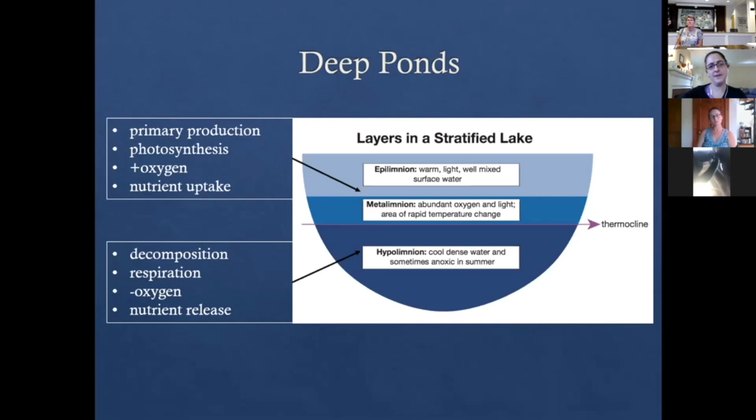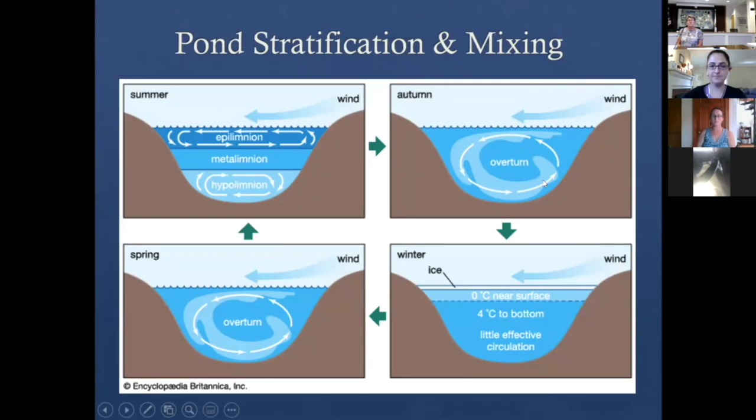So looking at Schoolhouse Minister Pond, as Jane mentioned, there's been a lot of effort going into studying this, and a lot of this has come from volunteers helping to do monitoring both in coastal waters and also in the ponds, particularly in the past. So in 2008, there was a study by SMAST. This is a school out of the University of Massachusetts.

And they looked at 10 ponds that had been studied in Eastham, with data collected from 2001 to 2006. This was part of the Barnstable County PALS, or Pond and Lake Stewardship program. Some of you may be able to give a wave. I'm sure some of you may have been involved in collecting that data.

So that measured everything from temperature, DO or dissolved oxygen, water clarity with Secchi depths and discs, alkalinity, chlorophyll A, which is really a measure of algae, and also nutrients like nitrogen and phosphorus, and then pH.

One thing, again, that's just important to note for ponds. Ponds typically, in the freshwater sense, are phosphorus limited. So when you have too much phosphorus, that's when you tend to have problems with too much plant and algae growth. Nitrogen, however, is also important to look at in freshwater ponds, because when you have too much phosphorus and too much nitrogen, the nitrogen kind of facilitates that extra growth that phosphorus allows for the plants and algae.

More recently, as Jean mentioned, Solitude Lake Management was hired to do assessment of the pond's conditions since 2009, and they've been monitoring both vegetation and water quality. So this is the most word-dense slide we've got, but here's kind of a combination of some of those results from all of those studies.

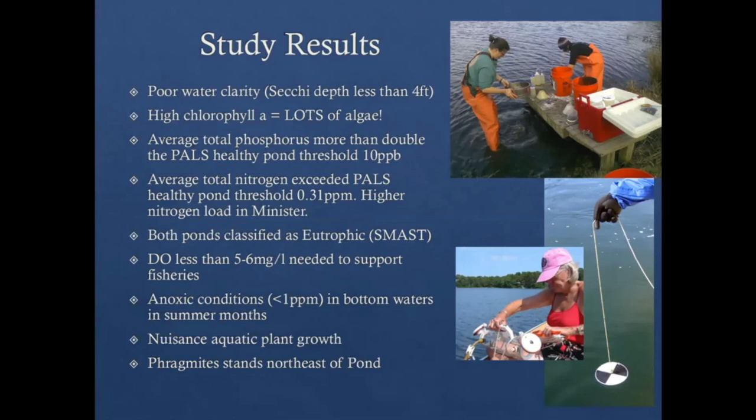And looking at the nutrients, again, total phosphorus and total nitrogen both exceeded what was set out as the healthy pond threshold by that PALS, the Pond and Lake Stewardship Program. So we've got excess nutrients, lots of algae. So as a result, both of those ponds, according to that SMAST study, are classified as eutrophic.

In terms of DO, or dissolved oxygen, there was less than 5 to 6 milligrams per liter measured in both, and that means that it's less than the state standard for supporting cold and warm water fisheries. So there's not enough oxygen in the water to support fish throughout the monitoring period. And again, as I mentioned before, because this is a thermally stratified system, at the very bottom, you can also get these anoxic conditions, which were measured in summer months in these ponds as well.

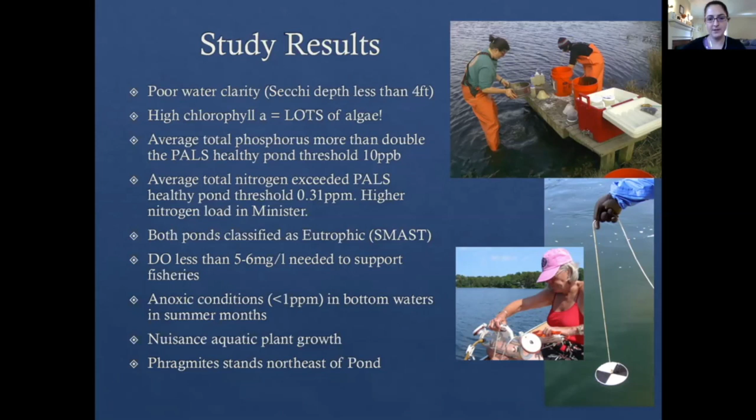So as a result of all of that, there's been kind of nuisance aquatic plant growth, particularly in those shallow areas between the two basins. And more recently, an identification of some Phragmites stands northeast of the Minister Pond. So the town has gone about getting funding to do this kind of comprehensive multi-step approach. First, treatment of the Phragmites, then dealing with some of these other issues that were mentioned, the excess plants, dealing with the dissolved oxygen, and then the source of that.

So I'm going to kind of run through these. Here you can see the stand of Phragmites after it was treated, one of those stands. This was a targeted treatment that was done last year, which was quite effective. Here you can see the plants very dead after that treatment. The next step was to deal with the excess aquatic plants and the low dissolved oxygen. So the aquatic plants were dealt with a hydro rake. This was done last fall in October.

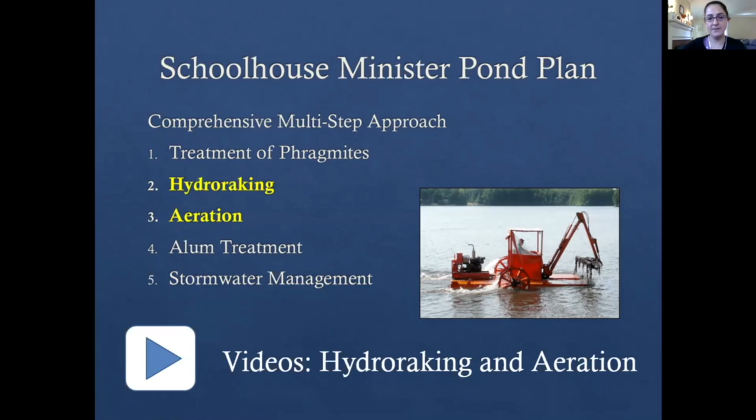Some of you may have seen this out there or seen some clips of this. This is an example of what a hydro rake looks like. Essentially, it's like a small backhoe on a floating barge. And we've got 2 short videos. I'm going to show you clips of these that kind of give you a sense of what that looks like in action. So I'm just going to switch over to our videos here.

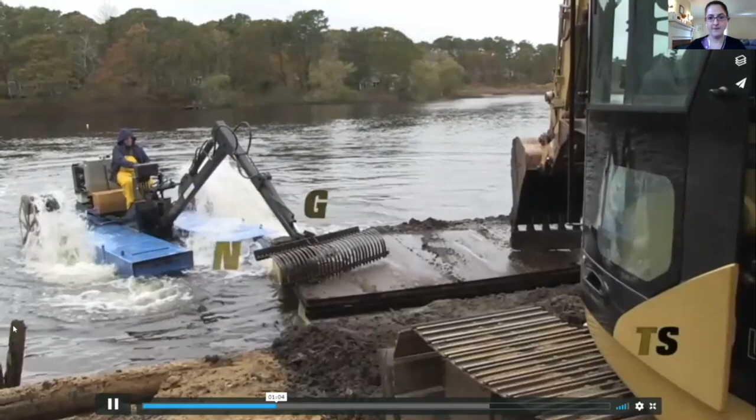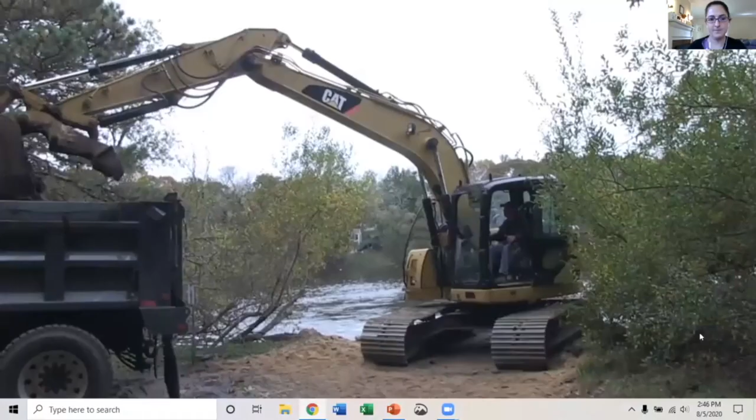The goal of the program is to maintain a balanced level of water lilies in addition to other nuisance aquatic plants, improve open water habitat, and promote growth of less invasive plant species, at the same time providing access for recreational activities. Primarily, aquatic plant control will be achieved through this first phase, hydro raking. Solitude Lake Management was contracted to conduct this effort. This work was performed in conjunction with our DPW department.

So here in this image, you can see those water lilies, the excess plants there, and then this is the hydro rake, again, working, able to reach down to the bottom of the pond in those shallow areas, pull up the rooted system and some of the excess sediment that's been building up in that area. And again, that was a very targeted effort just between those two basins. And again, because it's relatively shallow there, this is a pretty effective means of getting at that.

I'm just going to switch to the next. So that was the first step. And then the second piece that was worked on this spring, in April, the town hired Solitude Lake Management to help deal with the low dissolved oxygen. So again, I'm just going to show a short clip of this video as well, so you can see what that aeration looks like.

I'm here with Mike Didier from Solitude Lake Management, and he's going to describe what we're doing at Schoolhouse Ministers Pond. Mike? Yep. So right now we're installing a large lake aeration system. We're putting 10 diffuser heads out in the lake, evenly spread. It's going to provide the right amount of oxygen to raise the oxygen levels from the bottom of the pond all the way up to the top. This will reduce algae counts as well as reducing the amount of organic matter buildup, all in the long term helping the pond aesthetics as well as the ecological value. And then outside of this, we're looking to potentially do a third phase with an alum treatment. We'll reduce the amount of phosphorus in the lake and go from there. Great, thank you.

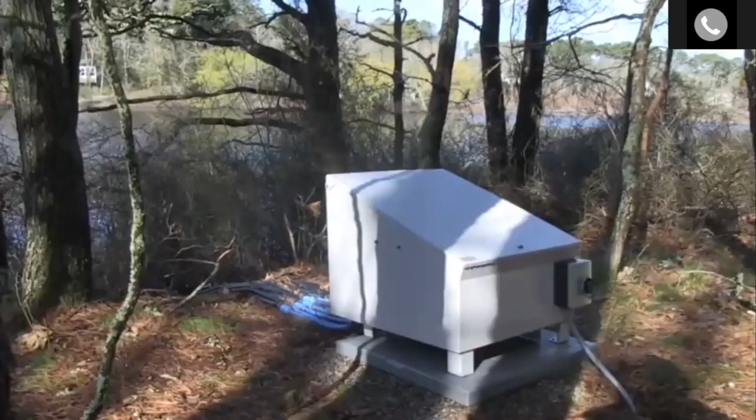So again, here you can see they've set up a compressor along the side of the pond near the school. It attaches 10 weighted hoses that go along the bottom of the pond to those 10 diffuser heads. You saw him lifting one of them out onto the boat. And if you're out on the ponds now, you may see some bubbles. So this is that aeration. It's allowing mixing of the water so that you don't have those low oxygen conditions, adding more oxygen to the water and also mixing it throughout.

So those are kind of the first two steps that the town has taken to address some of these issues. And they're important steps to address the near-term problems in terms of excess aquatic plants: dealing with the invasive species while it was a small stand, using the hydro raking to remove some of the plants, and aeration, increasing dissolved oxygen. If you remember, at the beginning I said if you have stratified, low oxygen conditions, that can actually allow for release of nutrients. When you increase the oxygen at that lower level, if you have excess nutrients in that soil, that can help stabilize and hold them in there.

The next step that was mentioned in that video is possible alum treatment. So alum can be put in, and that binds with any phosphorus and inactivates it, and it then sinks down and sits in the soil. So if the aeration isn't enough, there's not enough oxygen to stabilize that, or you have phosphorus within the water itself, that's another way that you can get rid of some more.

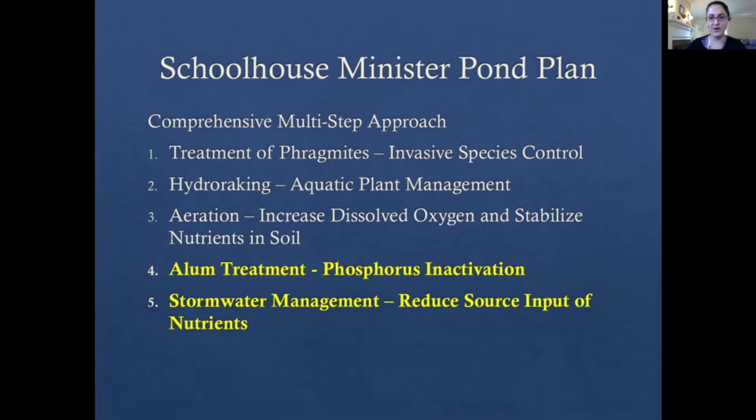And then the last piece, which I want to introduce, is the stormwater management. So this is what APCC and Horsley Witten have been working with the town on. And this is an important piece, looking at long-term. So we address many of these short-term actions that can help improve the water quality. Now long-term, let's look at source reduction. That's eliminating nutrients and other pollutants.

So with that early 2008 SMAST study, they didn't do a full comprehensive watershed look, but they were able to estimate the phosphorus budget, looking at how much phosphorus is coming in and what are the main sources of that. So in Minister's Pond, runoff from roadways is the biggest source that they identified. Roughly 30 to 60% of the phosphorus in that pond basin is coming from roads. The second is from septic, as there's some houses right along the edge of that.

In Schoolhouse Pond, roadways again were pretty significant. It was secondary; 18 to 34% of the phosphorus budget they estimate is coming from roads, with a larger portion from bird excrement. So that's pretty important to understand. That's a significant source. So that's why addressing pollution coming in with stormwater is a good approach. So with that, we've been looking at two sites.

One here is town-owned at Fisherman's Landing, coming down next to the school, to Schoolhouse Pond. And then the second site is looking at runoff from this large section of Route 6. This is a state-owned route. Currently the water has been going through storm drains and being piped into Minister's Pond. Again, this is a significant amount of roadway and source of pollution.

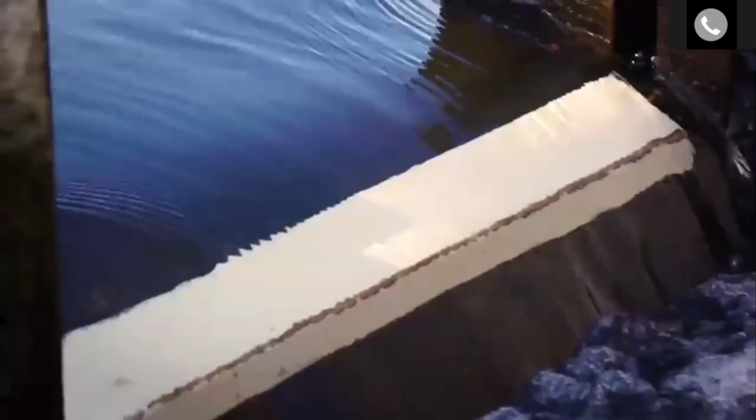When raindrops fall from the sky, trees and plants help break their fall. In the woods, rain is gently guided to the ground below, where plant roots and microorganisms drink it in. Here, impurities in the rain are filtered out. Rainwater, not absorbed by the plants, continues to seep into the ground, restoring groundwater and filling lakes, ponds, and streams. The Cape's groundwater, the same water we drink, depends on rain and snowmelt for its replenishment.

Roofs, driveways, roadways, and parking lots are not so welcoming. The rain washes these hardened surfaces of dirt particles from air pollution, fertilizers, oil and gas from cars, litter, and pet waste. And with no place to soak in, the rainwater gathers in puddles or speeds down the road, taking the pollution with it. Flowing from our streets into our coastal waterways, this is where rainwater becomes stormwater.

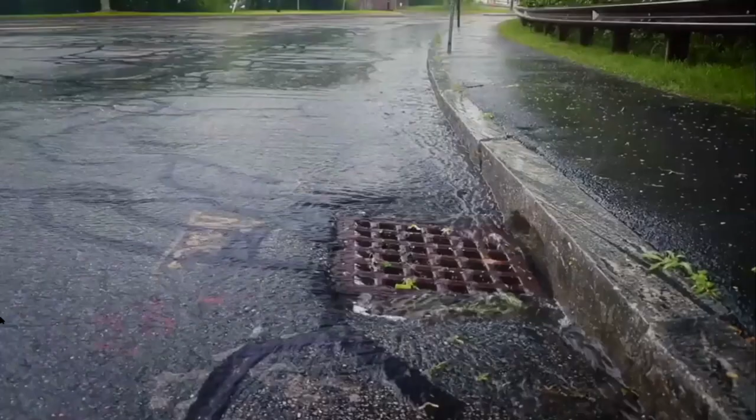But water is a resource we can't afford to waste. Understanding this, we can use new ways to handle stormwater, and where we can, let the raindrops soak in where they fall.

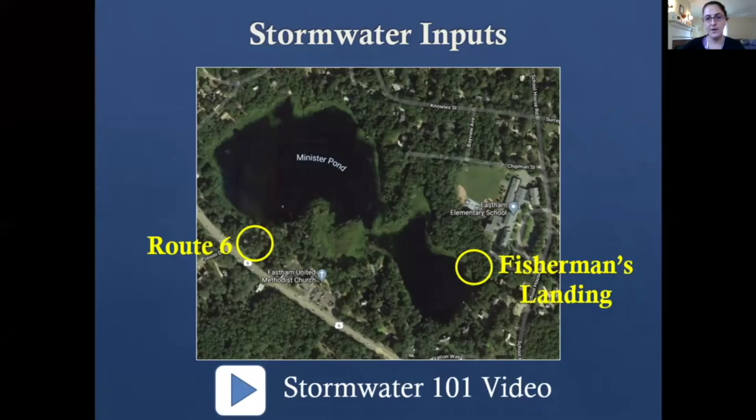I think that's the really important piece. Again, stormwater is any rain or snowmelt that's coming off of a hardened surface. Typically, we're thinking about roadways, but anything else that's a hard surface. And when it does that, it picks up pollution, and that includes things like nutrients and bacteria. So, typically what's been done, traditional stormwater management, you are trying to clear the roadways of that rain. It goes into these storm drains, and we generally think, okay, it's gone.

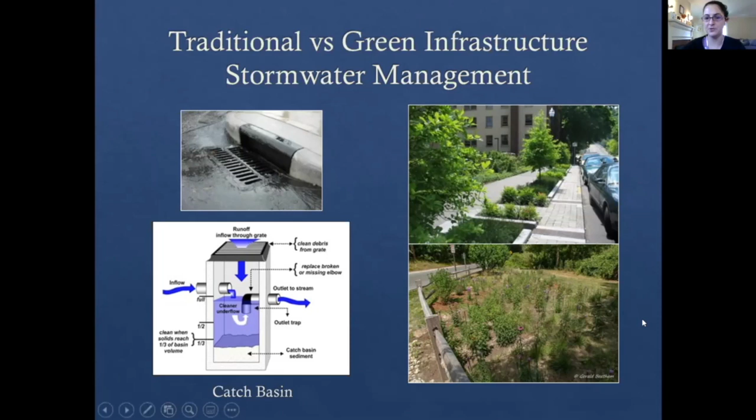So with this project and many others now, we're looking at an alternative, which is called green infrastructure, using plants and the soil media to help improve the pollutant removal with our stormwater treatment. So by adding plants and specific soil media, you can really get at not just the garbage and the oil and grease and the sediment and bacteria, but also nutrients and do it more effectively. So that's really the approach that we're looking at with this, going beyond the traditional, which really focuses on pre-treatment and just getting the water off the roadway, to really removing those nutrients so we can improve the water quality.

So this is kind of the overview of the project we've been working on. We started off early this year with some planning. In the spring, Horsley Witten went out and did a site assessment around Schoolhouse and Minister's Pond and those two areas I pointed out on the map, and developed several concept designs that were reviewed by the project team. In May and June for Fisherman's Landing, that included development of what's called 75% designs to be applied for permit applications with the Conservation Commission. And for the Route 6 location, which is actually, again, state-owned, we looked at several different options at more of a concept level design.

And so today, Horsley Witten, Gemma and Rich Claytor are both going to review those options that we've developed so far with you guys. And again, the next step is going to be the permit review for Fisherman's Landing. The end goal of this is that for that Fisherman's Landing site, which is owned by the town, we will finish up design, and then the town will be able to construct the system design for that.

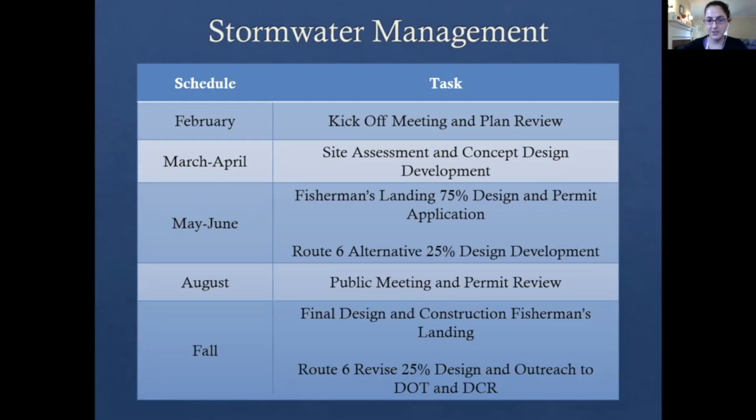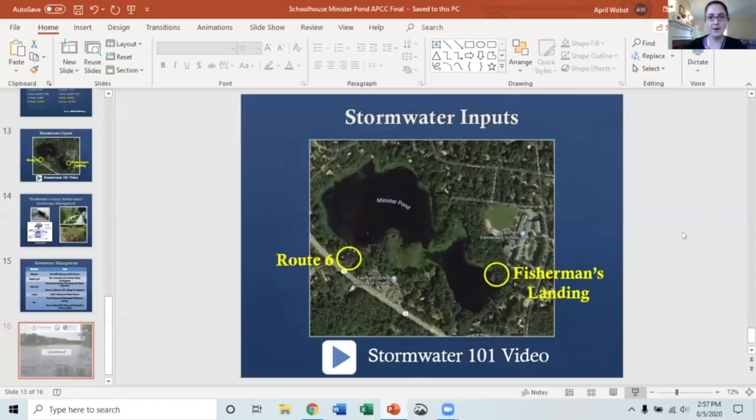And then here, again, Route 6 is such a big contribution to Minister's Pond. We want to end with some revised concept designs that the town and the team can then take to the owners of that property where we're looking. So DOT, the Department of Transportation, or in the case of one of the locations, the Department of Conservation and Recreation. So with that, I'm just going to pause briefly and see if there's any questions about some of the work that's been done to date, or the introduction to the project. We'll go into much more detail on the stormwater in a minute if there are not any questions.

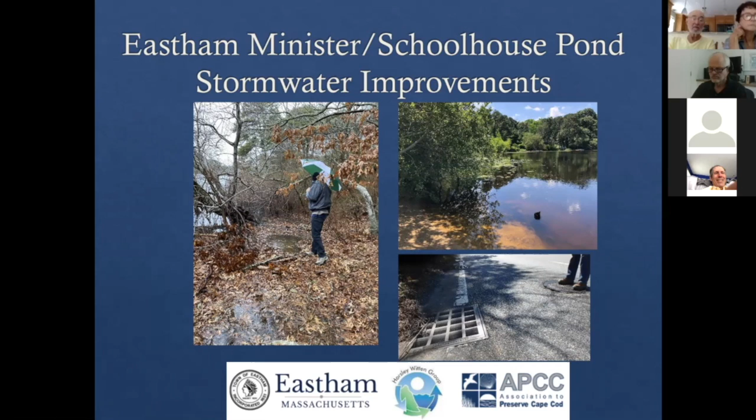So when we first started this project, we conducted an evaluation of the watershed to the Schoolhouse Minister Pond to identify potential site locations for stormwater management. We took into consideration site limitations and constraints like available space, soil properties, groundwater elevation, and whether the site was privately or publicly owned. And then we also took into consideration the amount of stormwater that the site could capture. So this project is all about improving the pond water quality. So we want to target the areas where you can capture the most amount of stormwater and prevent it from getting into the pond. So this map here shows the watershed area for the Schoolhouse Minister Pond.

This red bold outline is the watershed area. And some of you may be asking, what is a watershed? It's an area of land where all the water flowing underneath the ground and all of the water flowing or draining on top of the ground goes to the same water body. So in this case, it's the Schoolhouse Minister Pond. So this whole watershed area here that you see outlined in red is approximately 76 acres. And 11 acres, or approximately 14% of the total watershed, is impervious cover.

And as we learned through that video, the impervious cover is hard surfaces such as driveways, roads, parking lots, and rooftops. And I think the video did a good job of sharing why we care so much about impervious cover. The main reason is that stormwater runoff from hard surfaces can carry with it petroleum products, oils, sediment, chemicals, fertilizers, nutrients, and other harmful products directly into the pond and impair water quality. So when we are designing for stormwater management, we really want to target as much impervious cover as possible so we can reduce the amount of stormwater pollution entering into the water body.

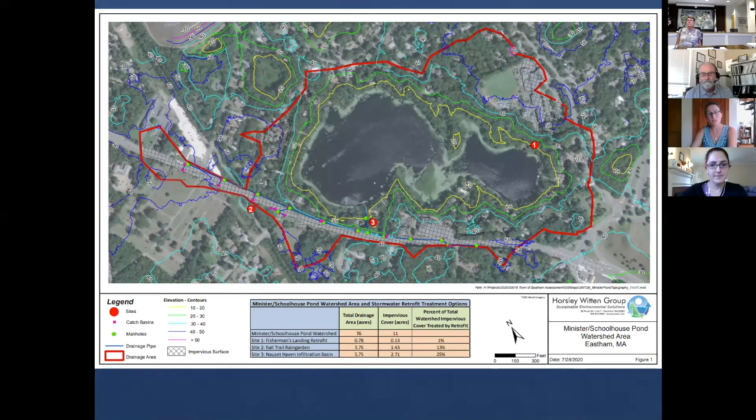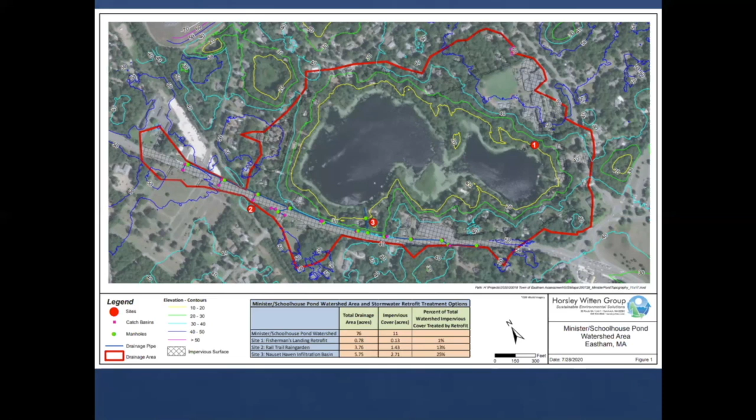All right, so moving forward, for each site, we have calculated approximately how much impervious cover out of the total impervious cover for the watershed is managed by each site. So for site 1 at Fisherman's Landing, the stormwater management practice here would manage about 1% of the total impervious cover for the watershed. And you may be looking at that and saying, oh, that's not a whole lot. But while this isn't a large amount of impervious cover treated, we feel that there are a lot of other benefits to this site that make it a priority for us to move forward with.

So what are we proposing here at Fisherman's Landing? The stormwater retrofit or practice, as we would call it, that we're proposing is a wet swale. A wet swale is a vegetated open channel, and it's located here in this blue outline. And due to how close the groundwater is, the wet swale will have a smaller portion of it that has sort of a permanent water pool in it. Wet swales rely on sedimentation, adsorption, and microbial breakdown to help remove the pollutants from the stormwater. And the best way to put it is they mimic the treatment properties of a natural wetland.

So we kind of like to think of it as sort of a swale slash wetland. An overflow spillway, which is located here, will help direct any excess runoff into the pond. And we have designed it with a sediment forebay made of plantable concrete pavers. And this will help trap any sediments or debris before the stormwater runoff enters into the wet swale.

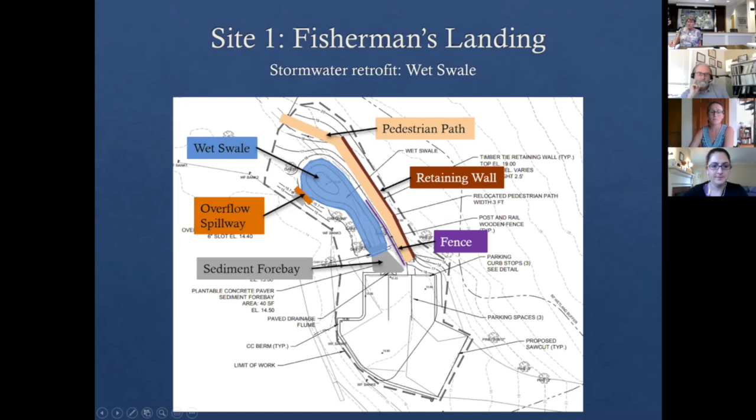So just an overview of some of the benefits that this provides, and again, some of the site changes that we're proposing here. So currently runoff from Park Street, Fisherman's Landing Road runs overland and discharges into the pond. The wet swale that we're proposing to put here will provide treatment of the stormwater before it discharges to the pond. There's also currently some ponding of water that happens, and you can see this in these two photos.

You'll probably notice them after a large storm event, and sometimes they take a few days to dry up. So again, the location of this wet swale, the regrading, repavement of this parking area, we're going to help direct all of that stormwater runoff into the wet swale and eliminate this ponding of water.

We recognize that Fisherman's Landing is a well-used, well-loved place by residents and visitors alike. During our visits out there to conduct field work, we saw how much this area is used, and we want to make sure that our design preserves the character of the site and allows people to use it in the same way. So you'll see that our design is sort of off from the parking area. It still allows people to park there, get into the water, use their boats, fish from the edge if they would like to. And we are looking to preserve some of the larger trees in the area to, again, keep that aesthetic character of the site.

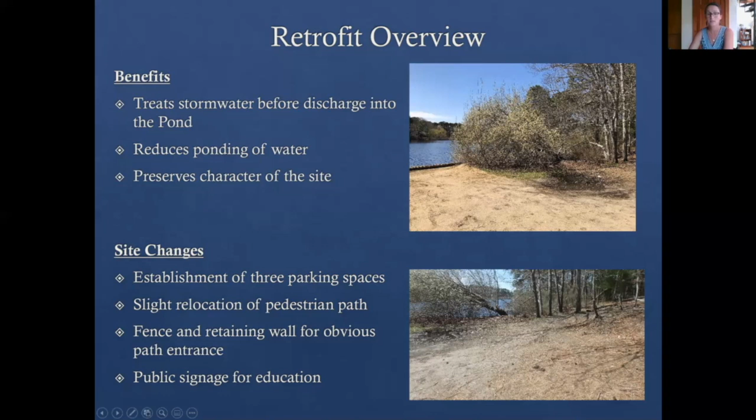And then public signage will be important, not only to help educate residents and visitors on the importance and the function of the wet swale, but also to highlight all of the other great important work that the town is doing to improve the water quality in the pond. So what does a wet swale look like? I'm going to turn it over to Rich, who has a lot more experience designing and implementing these, to talk through what these wet swales look like.

Thanks, Gemma. Just a couple of photographs here. We have a few examples to show you what we're talking about. This project was constructed about 5, maybe 6 years ago up in Harvard, Mass, north and west of Boston, off of 495. And the photo on the left is really right after the facility was built and the plants had just been planted. And the water that you see is very shallow.

It's really only a few inches deep, but it's about at the same elevation as the pond in the background. You can just see the pond in the background on the left, and that's Bare Hill Pond. And so that water elevation is groundwater. As April mentioned earlier, this pond in Harvard is a dammed pond, but it is controlling the groundwater.

And then just after a few years, those wetland plants grow in remarkably quickly, and they really love the water, number one, and then number two, they grow up pretty big and then hide that water. And so things like concerns that you might have in terms of getting into the water or mosquitoes or other things are pretty much eliminated by the vegetation.

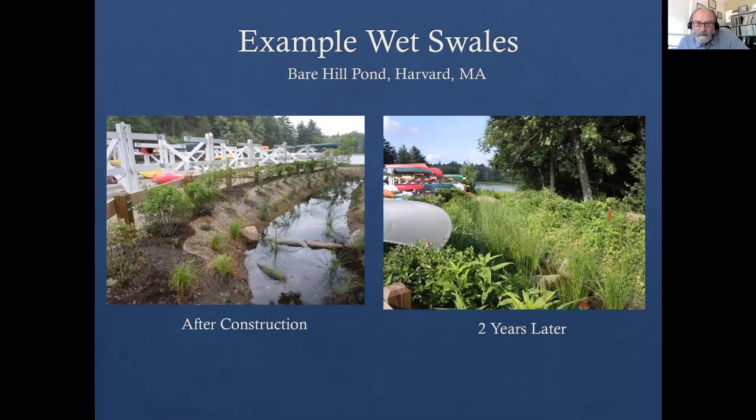It's not good habitat for mosquito larvae. It's good habitat for frogs and other critters that eat mosquito larvae. And so they work very, very well. And they're pretty safe too, because you get this vegetation that grows up around them.

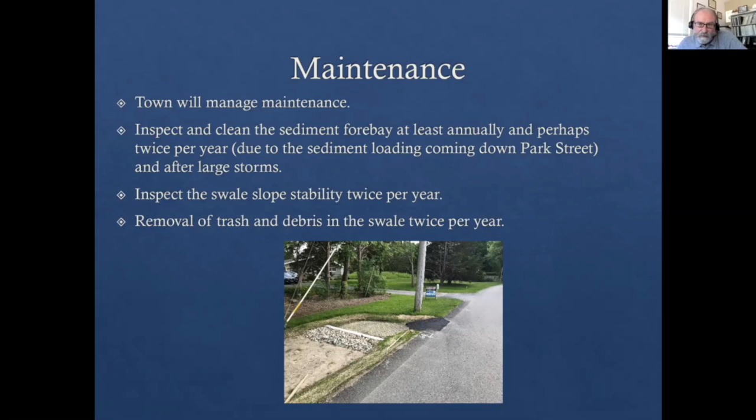So that will be done typically once a year, maybe twice a year, depending on the load, because Park Street is paved and there's a lot of load coming down there. We expect it might be a little more often to begin with. The other maintenance is just to make sure there isn't any erosion around the sides, and if there is, you fix it. And then any trash and debris in the swale can be removed. So it's pretty low maintenance once you manage the sediment.

Next slide. And then Gemma mentioned this. We're really close to the elementary school, number one. We are on town-owned property, so the town doesn't need an easement or permission to do this. We are getting ready to go to conservation for a hearing next week, so the applications have been submitted. And assuming all goes well, we will have construction-ready plans later this year and into early fall, and hopefully we'll build this beginning as early as October.

Great. Before we move on to site 2, are there any questions or comments on this Fisherman's Landing site? I did just see someone in the chat offered a question: how noisy is this project? Yeah, you mean building it, or noisy afterwards? During. Yeah, so this is a small project. It will involve some heavy equipment and maybe some excavation and removal of some of that soil as we dig it down. There's a couple of trees that are going to be cut down. So there'll be some noise associated with that, but it's very short-lived. This project can literally be built in a matter of days.

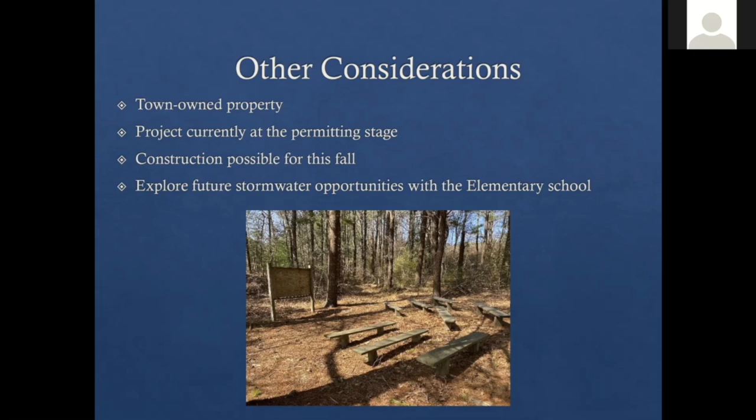Okay, we'll move on to site 2. So site 2 is one of the 2 sites that is proposed to help manage the runoff from Route 6. And site 2 is located along the rail trail. So some of you who live in Eastham may be very familiar with the site, and we'll share some pictures in a minute.

We calculated the drainage area that would be managed and captured by this practice here, and the impervious cover portion of that is about 13% of the total watershed impervious cover. So we're getting a little bit more captured here with this practice as opposed to number 1. And again, we think this site offers a lot of great benefits.

So what are we proposing here? We're calling this the Rail Trail Rain Garden. We're proposing a rain garden and a leaching catch basin here. A rain garden is a landscaped shallow depression that allows stormwater to seep into the ground. It uses plants, soils, microbes to help treat the stormwater as the stormwater infiltrates into the ground.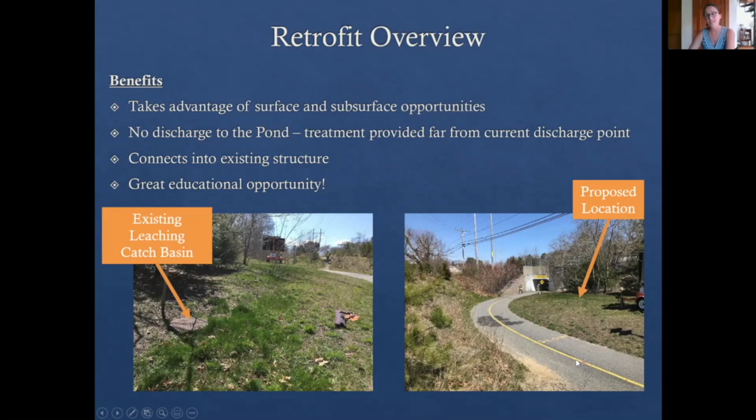And the rain garden, just as the name says, is a really great way to both treat the stormwater and meet those objectives, but also you could plant it with a range of plants depending on whether you're in a shady spot or a sunny spot. And the stormwater actually waters the garden, so you typically need a lot less watering, and we don't really water them.

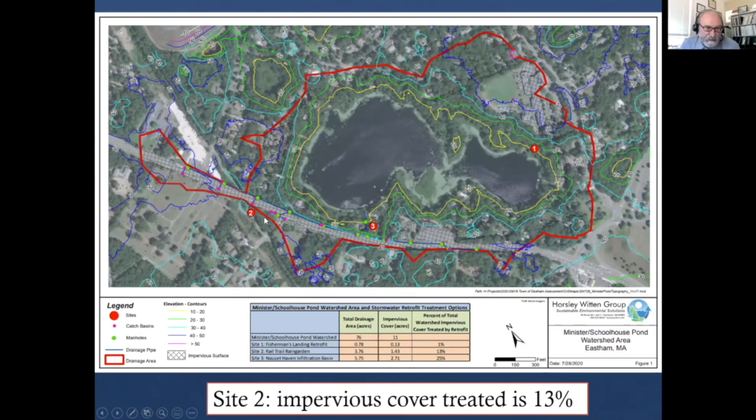And I think I saw a question in the chat, so maybe I'll just answer that while I'm going here. The runoff that would come to this is not just the path, but we would pick up the drainage from the highway itself. So there would be a diversion pipe that picks up the runoff off of Route 6 and then carries it off into this path. Because the rail trail is lower there, because there's an underpass, it's a really ideal location to collect this runoff.

So, and then just to conclude, a key consideration here is DCR is going to need to ultimately agree to do this and sign off on that. So we will be working with them. As Gemma mentioned, we're in the preliminary design stages. So we have to advance these at least to a certain level before we talk with them about permission and then ultimately maintenance. And then again, this would be a great location for educational signage for all the passers-by to see what we're doing there.

Rich, we got another question in the chat box. What will the effect be on the pond vegetation? Will this mitigate the excessive growth of lily pads? Yeah, I mean, what this will do is eliminate the nutrients.

Rich, we just lost your sound, I think. Rich, we can't hear you, but I can help answer this question.

So all of the 3 sites that we're talking about today, all of them are to reduce the nutrient load into the pond, into the Minister Schoolhouse Pond complex. So yeah, the more we can reduce the nutrients, the more it will help reduce the excessive growth of vegetation in the pond. And for this particular site, the rain garden here that we're proposing at the rail trail, all of the stormwater that's captured off of Route 6 and directed into this rain garden would no longer be going to the pond anyways. So that would be a whole chunk of stormwater runoff that would be completely eliminated as an input into the pond.

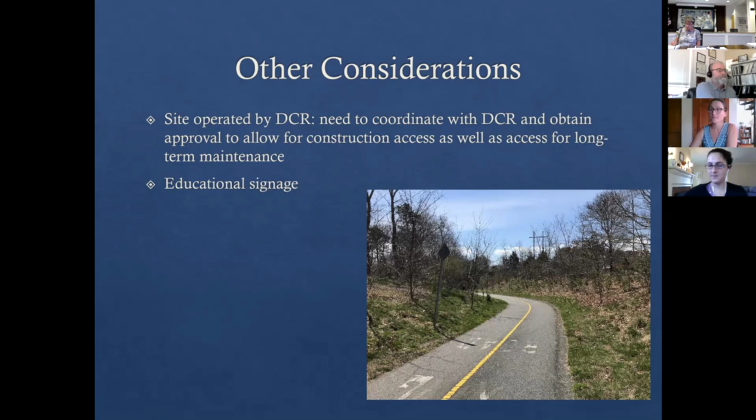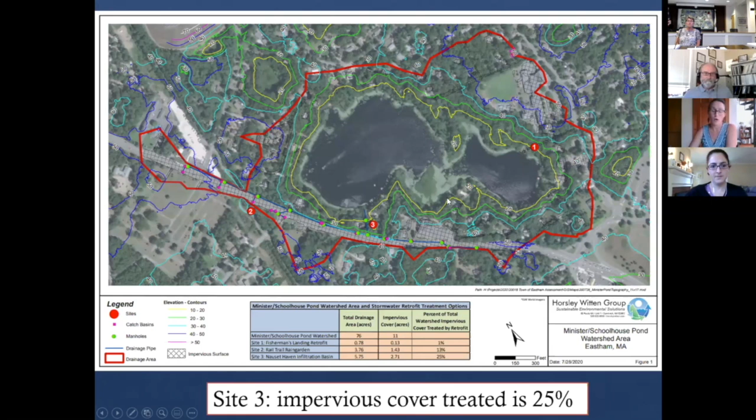Okay, so the last site that we want to talk about today is Site 3, which is at the Nauset Haven condos. Again, this is off the route. This is going to be managing the Route 6 drainage. So I'm going to show with my cursor where the contributing area would be. So it's sort of right to the right of that 2 on Route 6, all the way to the end, to the other side of this boundary. So it's quite a bit of road, and just given that it's predominantly impervious cover, it's a lot of pollutant load as well. So we calculated that the impervious cover treated by a stormwater practice here at Site 3 is approximately 25% of the total impervious cover of this watershed, which is quite a bit.

So what are we proposing to do here? We're proposing an infiltration basin. An infiltration basin is an open depression that infiltrates stormwater into the underlying soils. It is sized to drain all stormwater that's directed into it in 24 hours or less. And the basin will be planted with grasses, wildflowers, and shrubs, so it's not going to be just a basin full of rocks.

For this particular design, what we're proposing is a diversion manhole would be placed along the existing drainage pipe that discharges to Minister Schoolhouse Pond. This diversion pipe would be sized so that it only diverts so much stormwater that can be handled by this infiltration basin. Storm events that produce a lot more runoff than what this infiltration basin can be designed to handle will be still discharged through this existing drainage pipe.

The diversion manhole will also have a deep sump to help capture sediments and debris before it discharges into the basin. And there is a sediment forebay again here to help also capture sediments before it enters into the infiltration basin. We have designed an overflow spillway, which is located sort of on this side of the basin, and that would be to divert any excess stormwater overland. Again, we designed this in a way that does not anticipate any overflow happening.

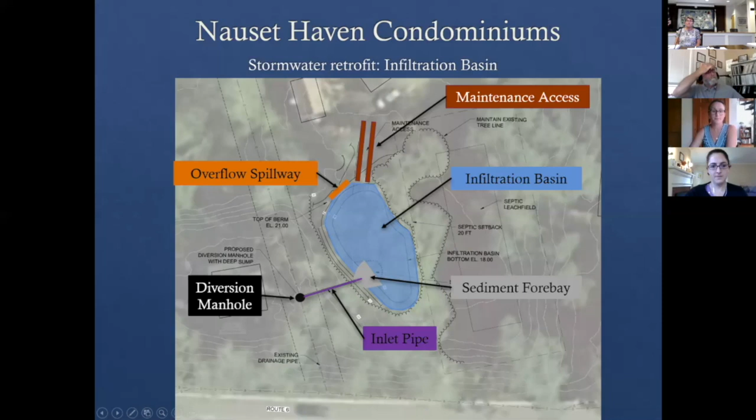What we like about this practice is that it treats the largest volume of stormwater and the most amount of impervious cover for all of the options that we've discussed. It is an offline practice, so again, stormwater that's directed into the infiltration basin will not be discharging into the pond, and it is designed to drain in 24 hours.

Because of the proximity to the Nauset Haven condo units, we have designed this to be able to preserve as best as possible the character of the site. So we do intend to leave in as many of the large trees as possible to provide a visual barrier to the stormwater basin. And again, changes to the site include, you're gonna have this basin, it will be located near your existing leach fields. We will preserve as many large trees as possible, and including site access for maintenance.

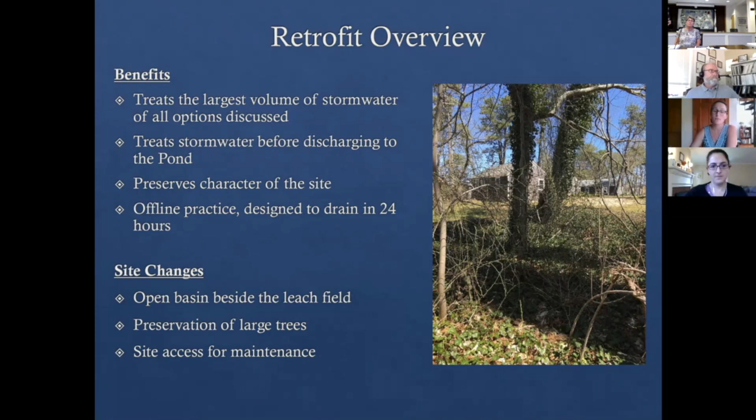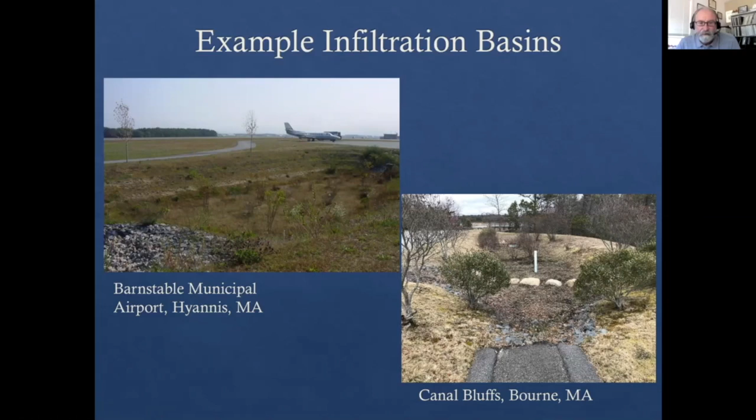So next slide. So maintenance on this, our expectation is the DOT would maintain the sediment forebay and maintain the diversion structure, because this is their runoff off of their highway. That involves inspection twice a year, mowing the berm, and cleaning out those pre-treatment devices.

We expect the easiest way to get to this would be through the condominium access driveway and access to the existing houses and residences. And then our expectation would be maintenance would be done in the fall and maybe early winter, early spring. And then, depending on the condo ownership, we sometimes see aesthetic maintenance, maybe the mowing, maybe the pruning of the vegetation done by the local residents, and then the more heavy maintenance of removing sediment or fixing any kind of erosion would be done by the DOT. So just some options for ultimate maintenance.

Next slide. And then again, some key considerations is we certainly need the approval and the coordination with the property ownership. This is on private property, so there'd be some kind of an arrangement or agreement between the DOT and the condo association to allow this to be done here. We would definitely build this in the off season. And then the expectation is it takes a little bit of time to get that image that Gemma showed of the future view. Typically about a year for the vegetation to establish.

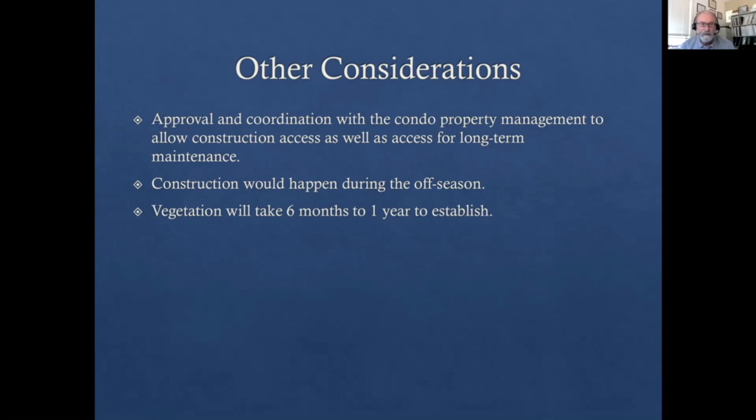Okay, next. So just to wrap up, and then we'll take questions or comments. So to summarize, we've identified 3 potential sites to help manage stormwater inputs into the ponds. And if we total all of the impervious cover treated by the 3 practices, we're looking at a total of 39% of the total impervious cover treated, if all 3 were to go to construction and be implemented. The remaining large amounts of impervious cover still left to manage include the elementary school, some of the large parking lots associated with the church here.

And really the rest of the impervious cover is sort of your residential houses, driveways, and some of these smaller roads. So, if we did implement all 3 of these projects, it would go a long way to help improve water quality in the ponds. Great. So are there any specific questions, particularly about that last site that we addressed before we go to the general questions?

I think one important thing, again, to note just about the last 2 sites from the Route 6 runoff. Again, that's a state-owned road, so obviously there's going to be coordination with the Department of Transportation and maybe for the bike trail as well with DCR since they own that site there. But I think it's really valuable that the town is looking at this because, again, the impact is happening to the pond and downstream in the coastal water.

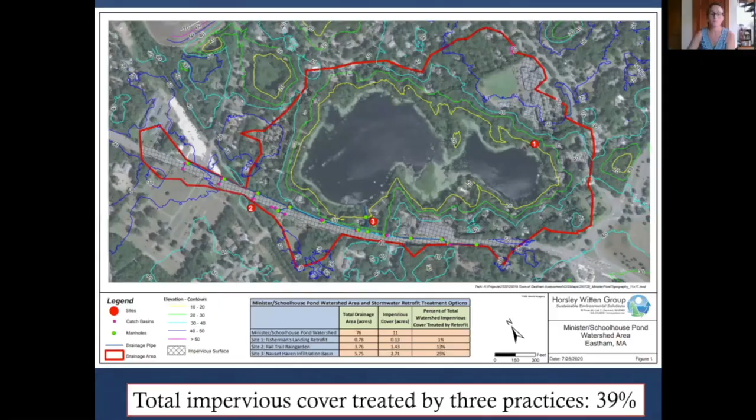Yeah, I think that the short answer is the DOT. The intention is for the town to approach MassDOT, who maintains and operates the drainage system, which is the pipe that collects the runoff off the road and then discharges to the pond. They have an easement to do that, and they are charged with managing their own runoff and drainage. And if we put in a treatment device, the expectation is that they would be responsible for maintaining the facility. Now, their idea of maintenance might be different than the people living there in terms of aesthetics.

So what you often see in a place like this is the DOT is responsible for cleaning out the structures of the sediment that builds up or the sediment that might be in the forebay, and they would come in once a year or once every other year and clean that out. But the grass won't get mowed or the vegetation may not get pruned or replaced if it died. So oftentimes you'll see the people that live next to one of these facilities would maintain what we call the aesthetic maintenance. So maybe mowing and maybe pruning or weeding and that kind of thing. So there would have to be an agreement between the DOT, the town, and the condominium owners for that kind of approach to move forward.

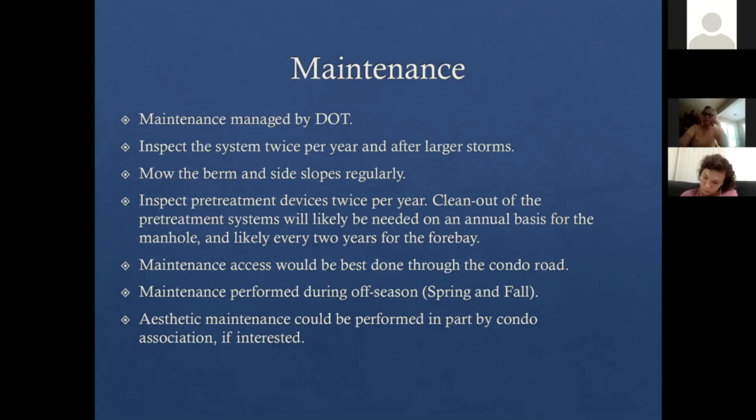We don't have detailed cost estimates yet for the two 25% designs as we're still advancing those. We will have a cost for that. The Fisherman's Landing cost, we have a material cost, and then the town is going to be building that with town personnel. So it'll be significantly less expensive than it would otherwise if you're going through a bidding process. Yes, and if I can address some of the budget issues.

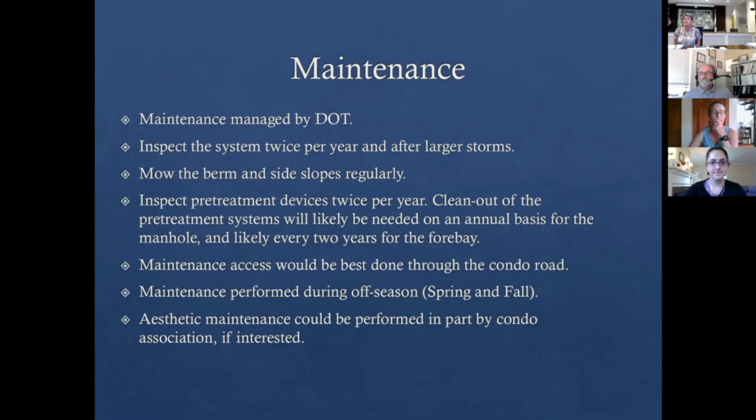So almost all, actually, of the in-pond treatment projects that were discussed, that were previously done, the Phragmites treatment, the aeration, the hydro raking, and potentially the alum treatment, were all CPA funded projects. The stormwater component of this project is actually in my wastewater management budget. So it's very important that we look at these two projects as complementary.

We're trying to just by management address improvements in water quality, but as April said, it's very critical to maintain water quality in this freshwater system that we reduce the source of the nutrients. And such a large contribution is coming from Route 6. We thought the best way to advance this project was to spend some money to do a 25% construction design and then bring the partners in that actually are doing the contribution, meaning Mass DOT.

So we have had earlier conversations with them, brought them to the site with actually some of our political leaders. Sarah Peake was involved in some of this conversation. Friends of the Pond, Sharon Shipley, actually was very critical in arranging that conversation, and others. I'm sorry if I'm leaving people out, but basically we thought it was in the best interest of the town to advance this work, to spend some money to develop a design.